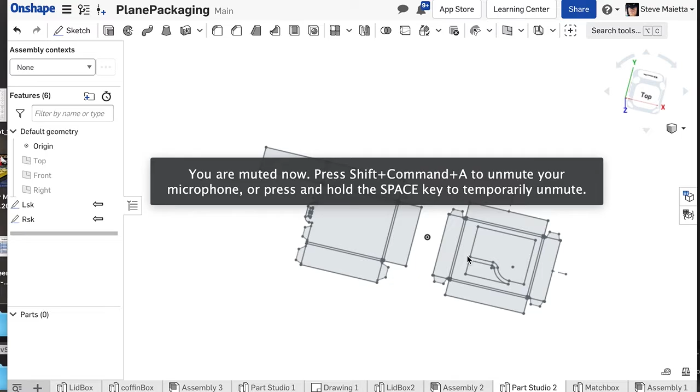Okay, here we go. We are going to make these sketches into something that will export for our laser cutter. The PDF we did is great for presenting to people, sending around the world, running through a printer, etc. But to laser cut, we need a different type of file.

Due to the way that we made these parts, these sketches alone will not work. We have to actually convert them into parts and then make another drawing. As you'll see, it doesn't really take that much time, so don't sweat it. It's going to save you a lot of time in the long run.

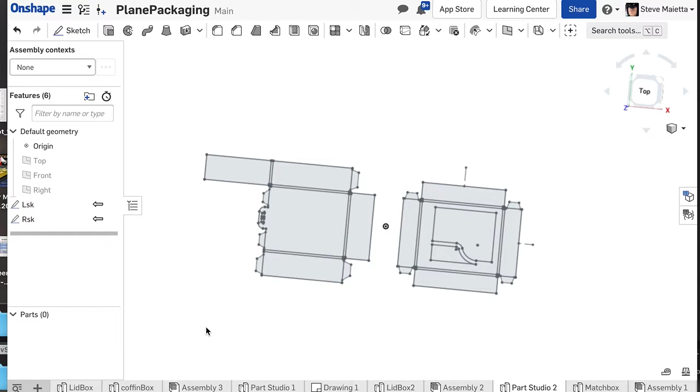So we need to extrude these up into an actual part. We're going to use extrude, and I'm going to work on the left one first. I'm going to pick the main panels to extrude first. So we're dividing our part into panels and tabs, and with tabs, we're going to put these strips in the middle, we'll call them corners.

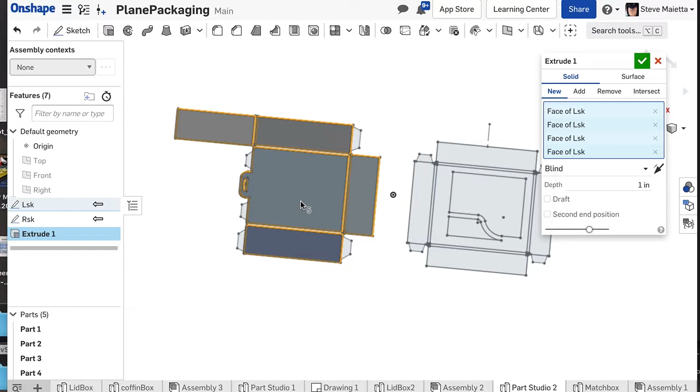These corners, these strips that are in the middle. So we're going to do the main panels. That's 1, 2, 3, 4, 5 pieces for me here to start. And we're going to extrude one.

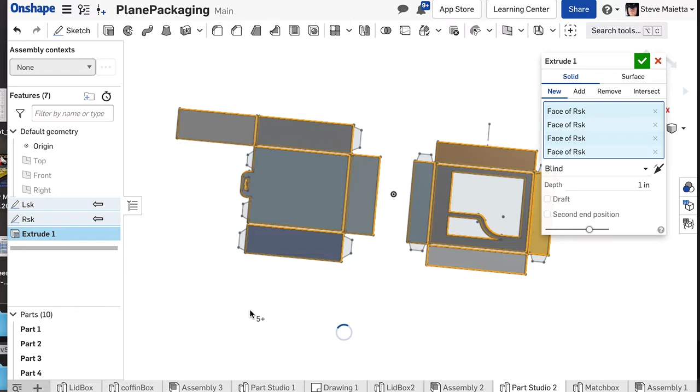You know what? Let's add these in as well, since we're talking main panels. Notice how it's going to end up making like 10 different parts. So let it think. We're going to make one more extrude. Okay, so there we go.

Now notice they're all different colors because Onshape made them all separate parts because they're all separated. What we're going to do next is extrude the tabs and these little strips separately, but then we're going to join them all together.

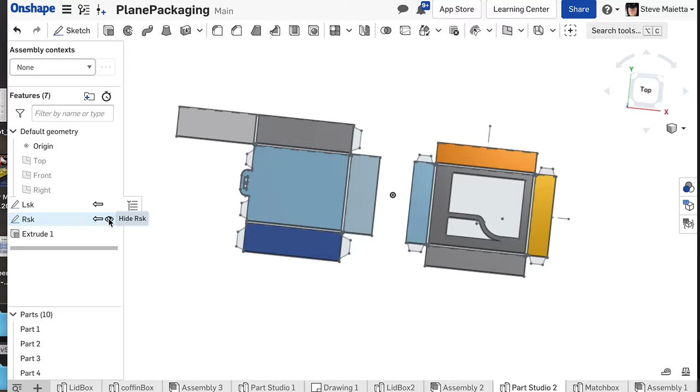So you need to make sure that your sketches are visible. Turn the sketch visibility back on for both of them. Now what we're going to do is make another extrude, and we're going to pick the tabs.

All right, and that's going to make all separate parts still. What we're going to do is pick all the little in-betweener pieces as well, these little strips.

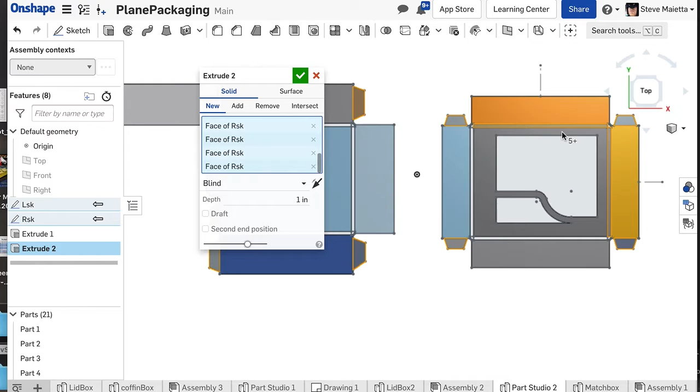All right, 1, 2. And we're going to go to this side. Pick the in-betweener strips. Don't pick a single edge, pick the full strip.

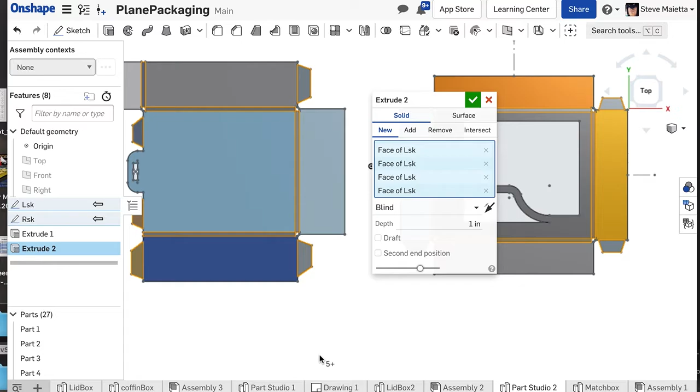So now we got all the parts there, and what you're going to do is say add right here. We want to add that, and we're going to say merge with all. When we click merge with all, it's going to convert that into as many parts as it can. In our case, I think 2.

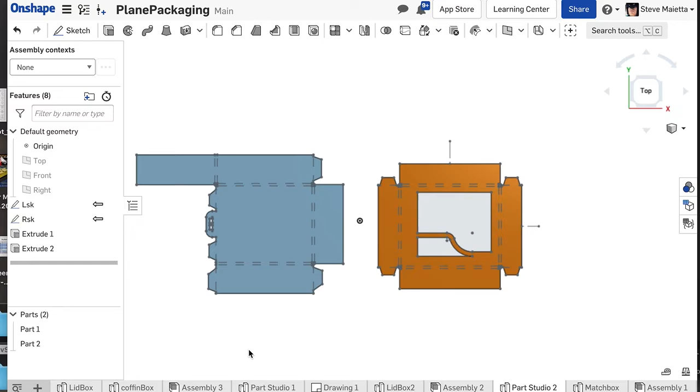So now notice what we have. We have 2 separate parts. But the problem here is that if you turn the eyeballs off, if you turn the sketches off, we lose all the information of the bends. You see, we lose our lines here that tell us where to bend these parts.

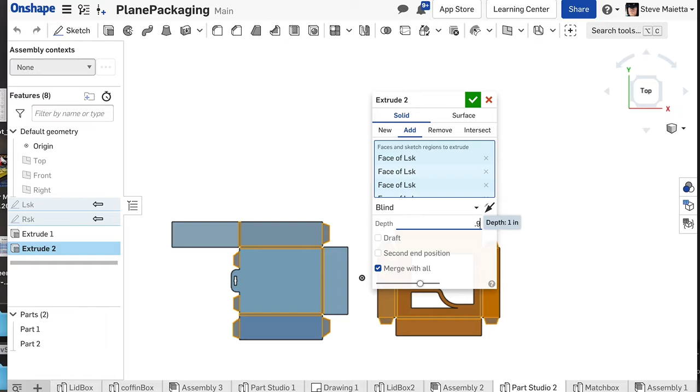So what you needed to do is set the extrudes to a different depth, a different height. Let's make this one 0.9. Now we didn't extrude them up as much. You see they're 0.9 and the rest is 1.

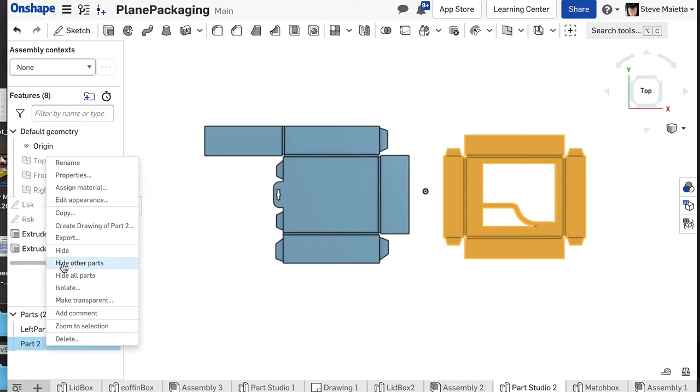So now we have those fold lines. That information has been preserved. Okay, now we have 2 parts, and I'm just going to rename them quickly. Left part, and let's call this one right part. Okay, and there we go.

So now we've got these 2 parts with all our information. So we're going to create a drawing. We're going to click OK. Go through the same process.

We're going to make it the right size, and then we're going to insert the parts after. Let it think here. For some reason it's taking a while. There we go. Well, that's pretty big.

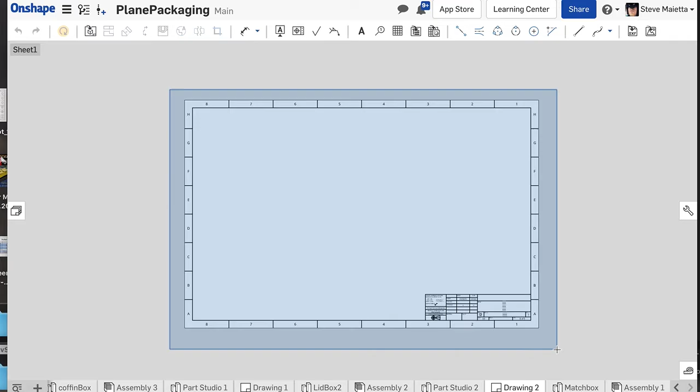Let's not insert anything yet. X this out. Let's select everything here and delete that all. So we have just a plain white page. Now we're going to go in our sheet menu, right click here, we're going to set properties.

We need to make sure that this is custom sized for our laser. Our laser is 24 by 12. We're going to accept that. There we go. Now that's the space we have for our laser.

We're going to insert. We're going to pick, my two parts are here. I'm going to pick one, start with left part. Now notice it wants to put it in from the front view.

Well, we don't want to see the front view. We want to see the top view, right? That's more like what it should look like. And we don't want 1/3 scale. We need this thing to be the actual size. So we're going to change to 1:1.

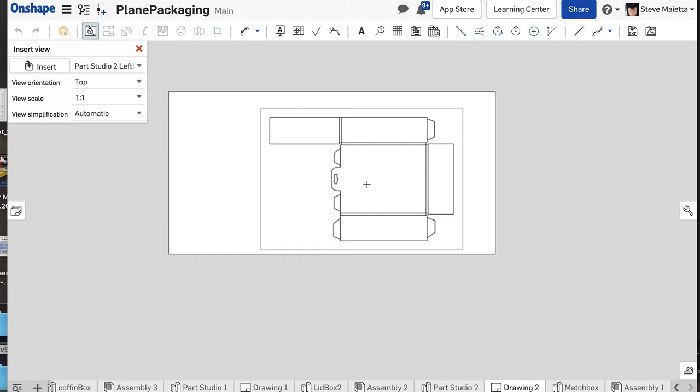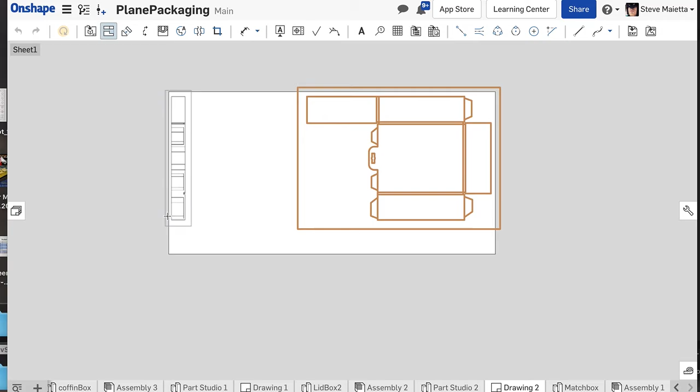And now I can put my piece on the page. Onshape will automatically try to give you a second view. Notice it wants to give me a side view here, or if I move here, it wants to give me an isometric view. I don't want any extra views of this part. All I need is that top view. So I'm going to press escape, and now I'm going to insert

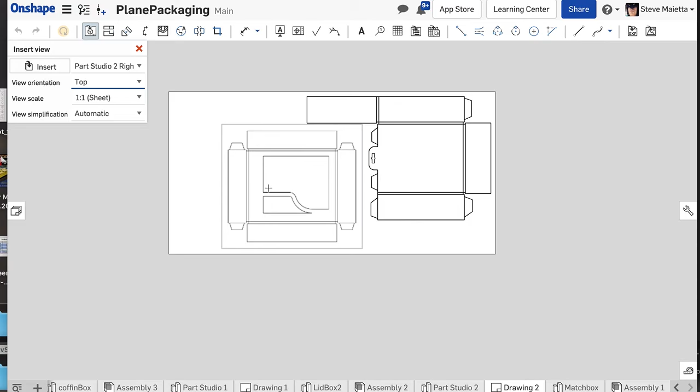my right part, and I know that it nestles in right here to fit. So I need top view, 1:1 scale, and I'm going to fit him in over here. Okay, actually I'll move him to the left. Now we've got our two parts fitting in.

All right, it wants to give me that secondary view. I'm going to escape out of there. All right, and then I can move this view over. Move this view over a little bit more. Now I've got my two views that we can print with all my detail.

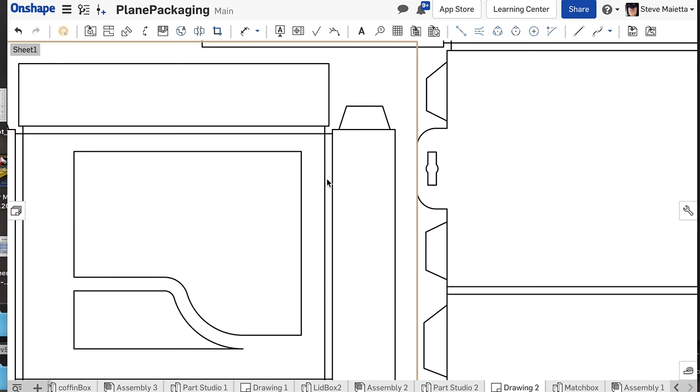Okay, now to get it to a laser cutter, to get us out of Onshape finally and into Inkscape, we need to export this. So down here, right click the tab, export as a DXF. And you're going to leave the options, hit download, give it a name up here that makes sense.

Patterns for Inkscape, patterns for IS01, because you may need to do this more than once if you mess it up. And I'm going to hit export, and now our patterns will get dropped down into my Chrome window, and it just did. What I'm going to do is drag this file and drop it onto my desktop, and now I can open that in Inkscape.